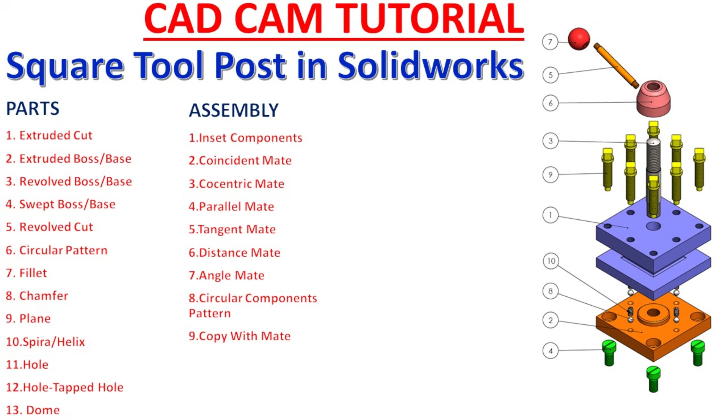Today we are going to take a simple exercise in SolidWorks, and here we are going to make a square tool post with the help of 2D drawings. We will make each and every part separately, assemble at the end, and also make a simple exploded view. You will learn all the basic features in this project.

I hope you like it. So let's start to make this project.

Let's make the first part of the square tool post, and that is the body. This is our main body, this is the top view. In section view, the first extrude is 30 millimeter, then the last extrude is 20 millimeter, and the middle one is 90 minus 50, which is 40 millimeter. The outer dimension is 150 by 150.

Then this middle one we are going to make, and that is 80 millimeter. 80 millimeter square we are going to extrude up to 40 millimeter. The last one is 20 millimeter, and that is the same dimension.

At center we will make one counter bore hole. You will see 27 millimeter, 60 millimeter for the counter bore hole, this length 10 millimeter. And there is a chamfer, 2 by 45 degree.

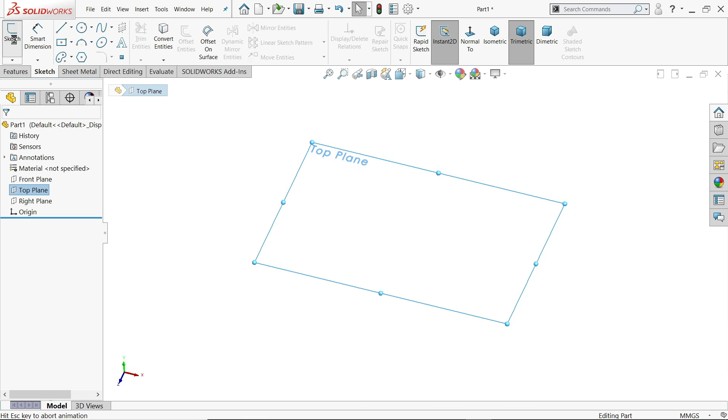So let's start with top plane sketch. Now activate center rectangle tool. Now 150, press tab key, 150, enter, escape key. Now see, this is perfect.

Now I'll extrude, and the end condition we will keep blind, and the first one is 30 millimeter. See, let it go downward so that all align one by one. Okay, that's it.

Back surface sketch. Again activate center rectangle, and this is 80 by 80. So press 80, tab key, 80, enter, escape key. Go to feature and activate extrude boss feature, 40 millimeter. See here, blind condition 40 millimeter.

Keep merge result so that we will get one body. If you unmerge, you will get two bodies, and that is we don't want.

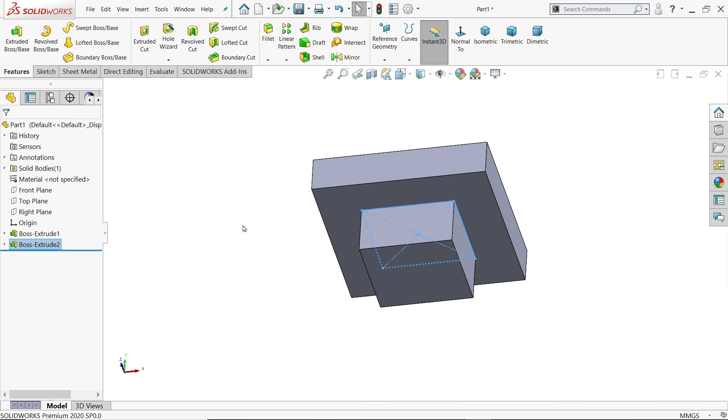Now I'll choose this face, sketch. Now here we already created sketch 1, so just click on sketch 1, convert entity. See, no need to draw again.

Activate extruded boss base feature, 20 millimeter. Isometric view, say yes. That's it.

Now counter bore hole we want to make from back side. Hole wizard. Now here choose legacy hole. In the type, choose counter bore. Now here the main diameter is 27, the center one.

27. Depth is defined by end condition, so we will keep up to next, or even you can choose through all. Let's say through all. So this is the depth.

Now the counter bore diameter is 60 millimeter, and the depth of counter bore is 10 millimeter. Okay, then there is no more to change anything.

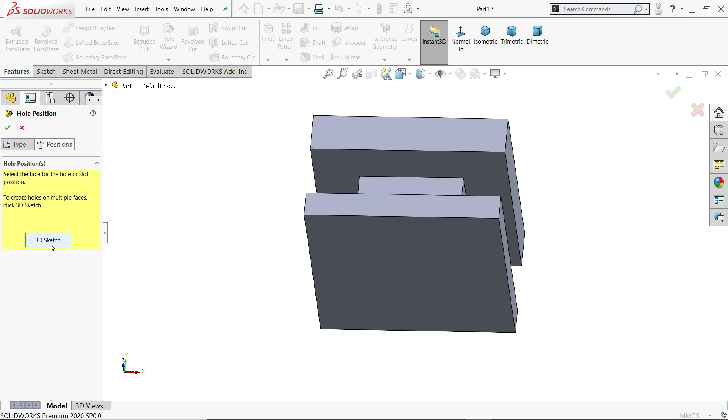Just go to position. Now it is asking you to choose which place you want to apply, so I'll select this face. Now see, you move your cursor to origin point, escape key to exit, and you will see the preview. I'll say yes, and look, the counter bore hole is created.

It is missing something here, so what we will do is edit feature. Now here we will do blind, and we'll edit this dimension, let's make it more than the length of this. Say okay, look, perfectly fine.

Now here we need to make these 8 holes, and you will see this hole dimension, 8 number of holes, M16. This is a threaded hole, so we will make these 8 holes.

Then there is 4 holes like this. See, 18 millimeter long, you will see 4 number of holes and depth 18 millimeter from point. So let's make this also.

So first hole wizard. Now I'll choose here straight tap, DIN standard tapped hole. Now that is M16. See, now end condition I'll keep up to next.

Okay, now here we don't want any countersink or anything. With thread callout also we don't need. Just simply choose cosmetic thread.

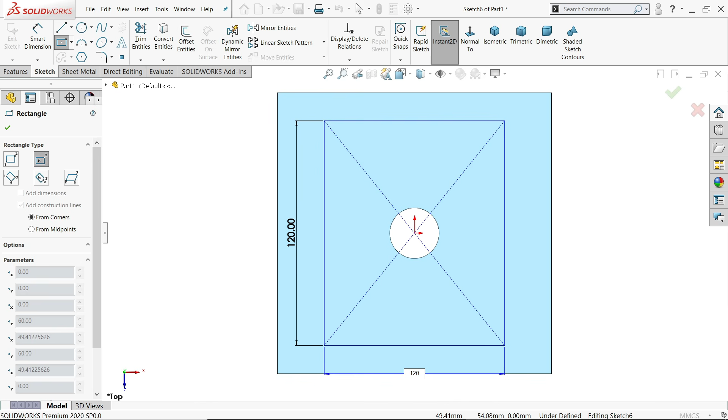Position, select this one. Just escape key to exit, activate center rectangle. Now 120, tap, 120, enter. Now here make sure you selected for construction purpose, say OK. Now by default here one selected.

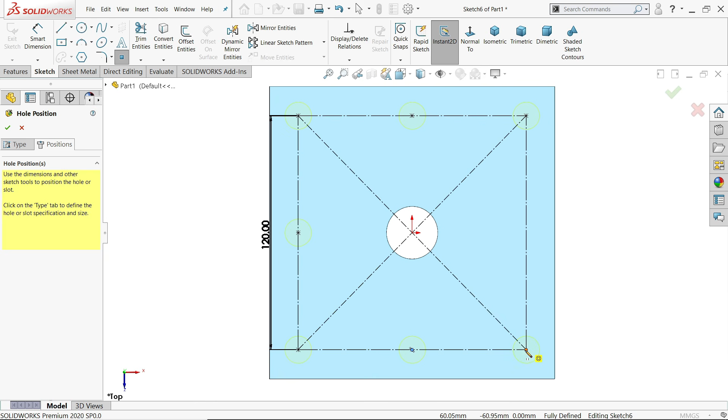Hold shift key and merge this point. Now activate the point here. Now place 1, 2. We need 8 numbers, so now escape key to out.

Now you will see the preview here, say OK. Now go to options, documents, properties, detailing, and just check shaded cosmetic thread, say yes, and you will see the threads.

Now let's select hole wizard. Here we want to make a hole, DIN standard drill size, and the hole is 10 millimeter, the simple, blind condition, and we will choose depth up to tip, 18 millimeter. Position, select this one, escape key to out.

Now let me activate center rectangle, draw a rectangle. Now define this 120, tap 120, enter. Okay.

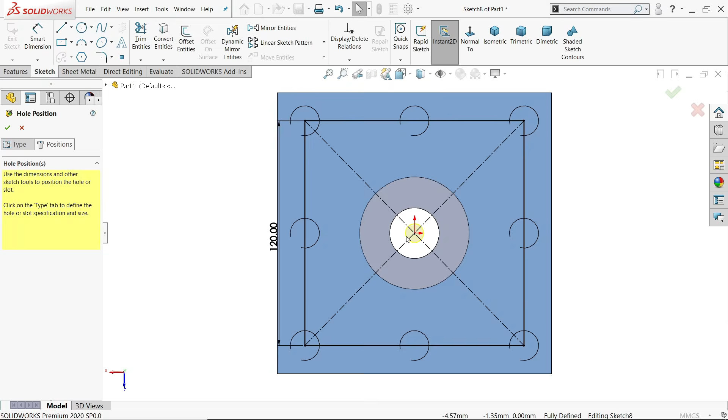Now this center hole we don't need, so again we have to delete. I don't know why this happens. Now let's merge.

Now click this point and activate the tool. Just place one here, one here, one here, and one here. Say OK.

We will apply some solid color to it.

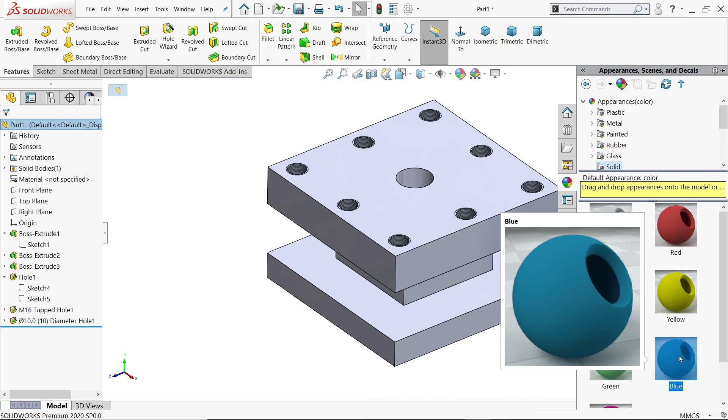Now activate fillet 3 millimeter, and I'll choose this corner. If you see some options here, it won't give proper options, so let's check one by one.

Say OK. Now let's save this one, create a new folder, square tool post, and this is the first part, so we will say body.

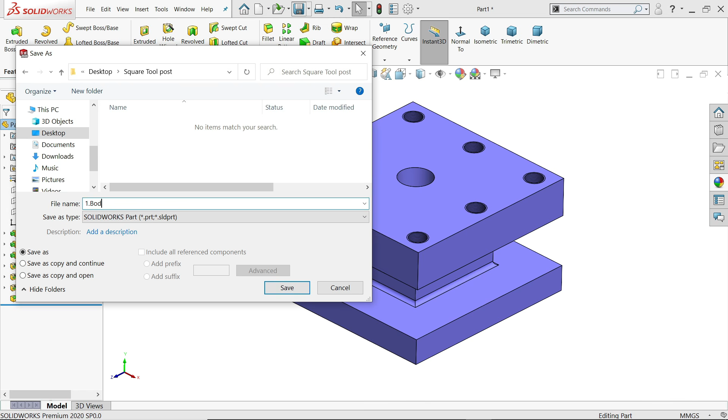Now just check the bottom side and say chamfer. Keep angle distance for the first one, 2 millimeter and 45 degree. Say yes. Save, let's move to next part.

Here the next part is base plate. So this is 150 by 150, thickness you will see from here 25. Then there is one circular body and this diameter 60, and this thickness from bottom is 34, so means it's 9 millimeter from this surface, and there is a 2 millimeter chamfer.

Then there is a counter bore hole, you will see 25 millimeter long, 28 outer diameter, 15 depth. Then 17 millimeter is the throughout hole diameter, so there are 4 numbers of things. So we will do this one, and at the center there is a thread M25 into 1.5 through DIN standard. Then there is one more cutout, like V cutout, 10 millimeter, 90 degree.

Top plane sketch. Now activate center rectangle, same 150 tab 150, enter, escape key to out. Now go to feature and activate extruded boss base feature, and this one 25 millimeter. Let's move upside, say OK.

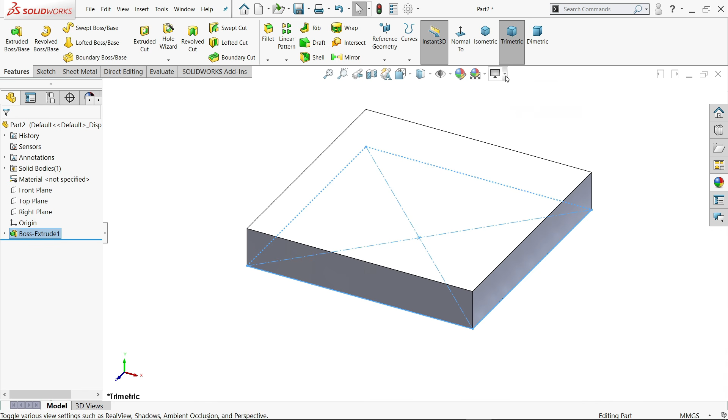Now select this face, sketch, now activate circle, and this diameter 60. Now activate extruded boss base feature. Now this width is 34 minus 25, it's 9 millimeter. Upside, say yes.

Now click on the edge and you will see the option chamfer or fillet. Chamfer, angle distance 2 millimeter, 45 degree. Say yes. Look, now there is a hole wizard at the center.

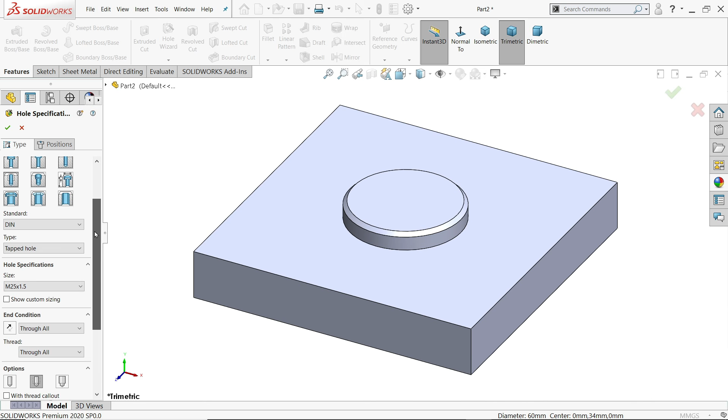I'll choose here straight tap, DIN standard, and tap to bottom hole, and that is 25 millimeter, 1.5 and 25, and end condition keep through all. We don't need any thread call out here, just simply choose cosmetic thread. That's it. Position, click this one and place at center.

Escape key to out. Just check the section view. Say yes. Go to option, documents property, and here you will find detailing. Click shaded cosmetic thread, say yes. Now we are going to see the threads.

This is the outer diameter, this is the inner diameter. Outer 25, inner it's maybe 23.5 something according to calculation. Now hole wizard.

Legacy hole, simple counter bore hole. Now the main diameter, this one is 17, and the blind - this one actually we want throughout, so let's check the condition through all.

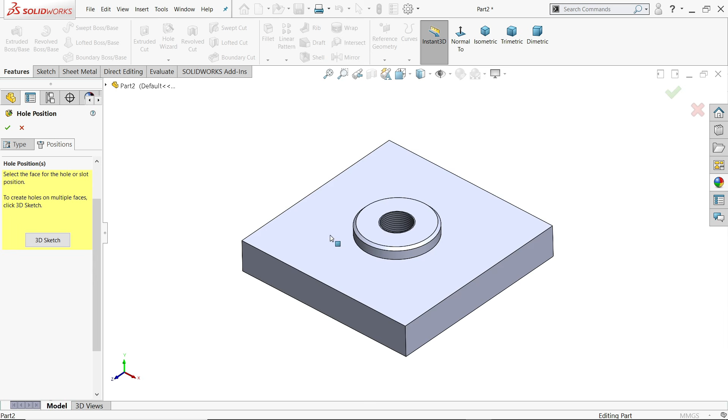Counter bore 28, depth 15, and then no more things we need. Position, select this position, just place somewhere here.

Now hold shift key, horizontal, these 2 points vertical, now these 2 points vertical. So this is a kind of relation going to be happened. Now this distance according to drawing is 116 millimeter, 116 millimeter.

Now I'll make a central, vertical and horizontal center line. Now let's define this. Hold shift key, select these two and center one, and you will get option make symmetric. The same we will apply for these two, symmetric. Now this is fully defined sketch.

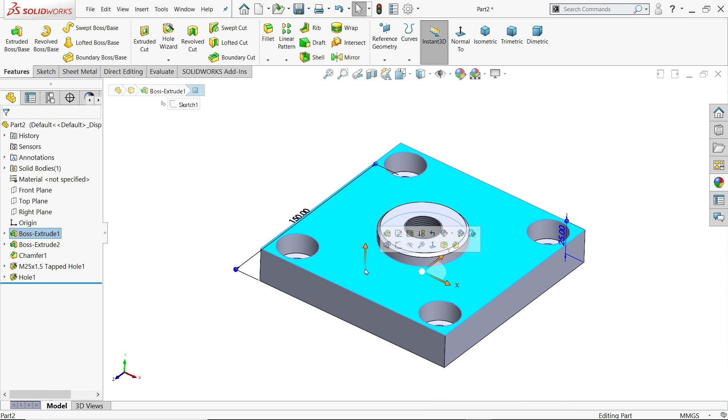If I am going to see section view, make sure it is going out, say yes. Look, now actually we want to create a front plane. We want to cut here actually. Okay, now let's make these two perpendicular to each other, as well as equal.

Dimension 10 millimeter. Now distance from center, it's 120 by 2, it's 60.

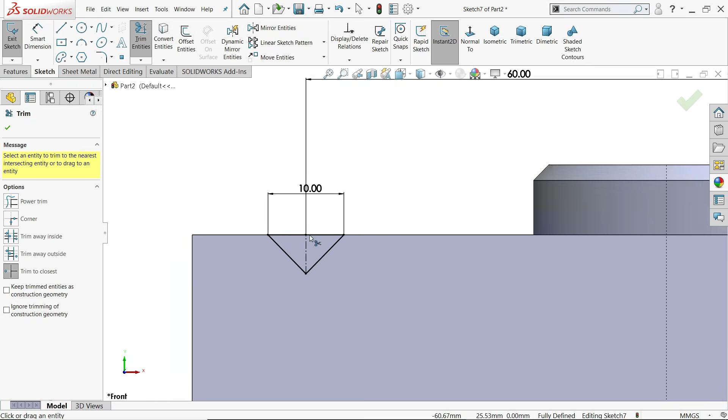Now go to trim entities and trim these two lines. Still we are missing angle 45 degree, and from here to here 5.

Choose revolve cut. Now see center line selected, this one 360 degree, say yes. Now look.

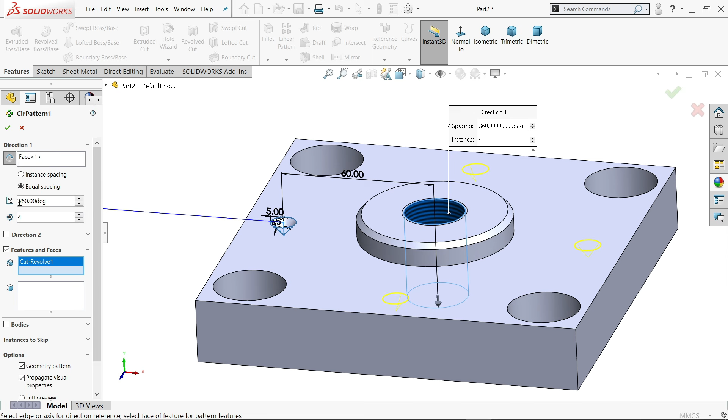Activate circular pattern. Now I'll choose any circular face. Now here the feature cut revolve is selected, equal spacing angle 360 and 4 number of instances we need, say yes.

Orange. This is part 2, base plate.

Now here the third part is stud, length 160. This 60 millimeter upper portion is threaded M25, bottom 30 millimeter is threaded M25. The middle one is 27 millimeter, and there is a dome shape 5 millimeter from here.

So let's make this one. Front plane is sketch. Let's activate line tool.

Make sure this one vertical. Let's define this.

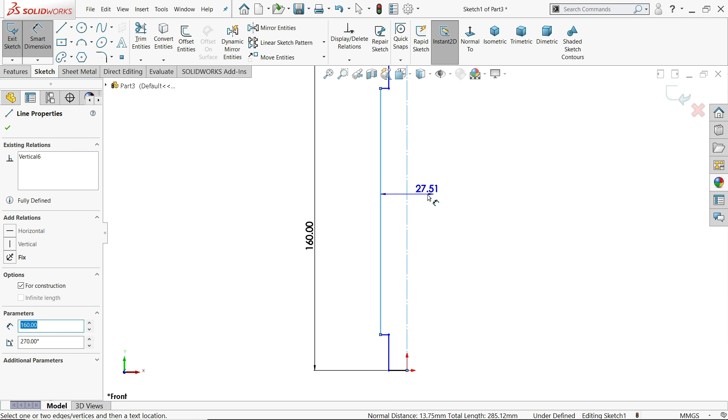160. Now make this one construction line so it's easy for us to define center distance or diameter 27.

Now this one 25. Now here also 25.

Now the length 10 - sorry, the upper length is 60. 30 millimeter is the bottom one.

Go to feature and activate revolve boss base feature. It is asking if you want to close geometry automatically, say yes.

The axis selected here, axis of revolution. Angle we keep 360, blind condition, say yes. Look.

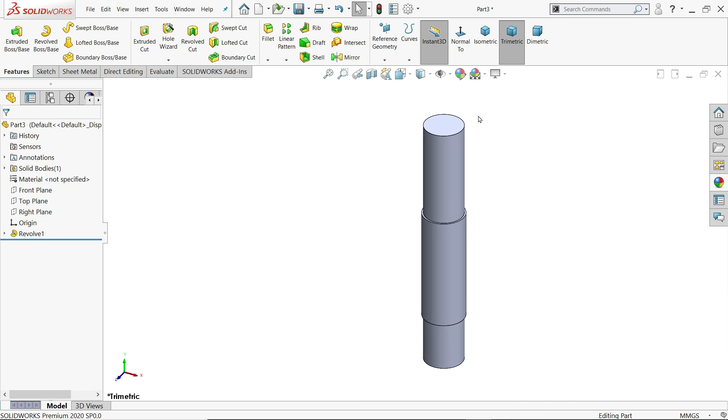Now let's add cosmetic thread here. Go to insert, annotations, cosmetic thread. Now I'll choose this edge.

DIN is standard machine thread we are going to make for this. Now here we need to make 25, so this is M25. Let's make up to next. Thread class we will keep 1. So this is the things going to happen. Say OK.

Let's apply to bottom. Insert, annotations, cosmetic thread. The edge is already selected here, standard DIN machine thread.

Now here the size of our thread is M25. Up to next - next means up to here, this step. Say yes.

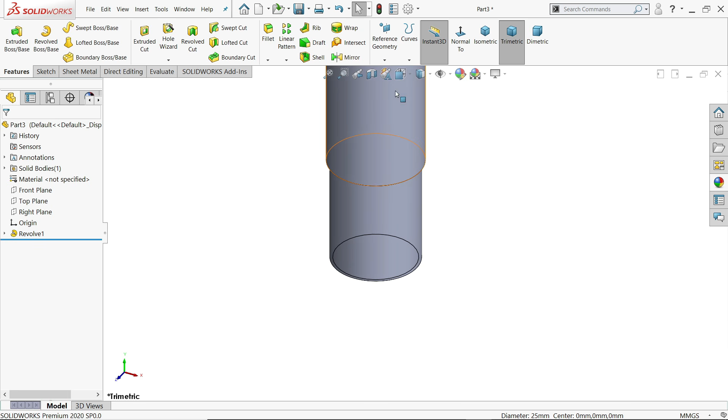Options, documents property, detailing, cosmetic thread. Now look, it seems very clear.

Now go to insert features, insert feature, and here you will find option dome. Now I'll select this face. Now here I'll choose depth 5 millimeter. See.

Now this one we will apply a material like metal - brushed steel. Say yes. This is part 3, stud.

Here the fourth part is knob. See the knob with thread.

So first make this round knob R20. Then we will cut from this end to this end is 38. Then 10 millimeter depth thread here.

This thread dimensions you will see here, 10 millimeter deep, M10 into 1 millimeter. So let's do this.

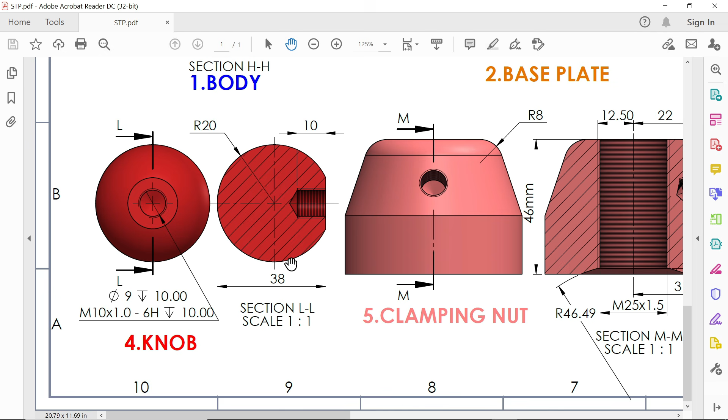Front plane sketch. Now I'll choose here circle. Now diameter 20 means 40 radius - sorry, radius 20 means diameter 40.

I'll choose line. Now trim entity, and I'll trim any one, like let's say this one.

Activate revolve boss base feature and choose this line. Axis of revolution, angle 360 degree. Say yes. The whole circle is created.

Now front plane. Now we want to trim. Let's say connect one line from one end to this end. Make sure this okay. Activate smart dimension.

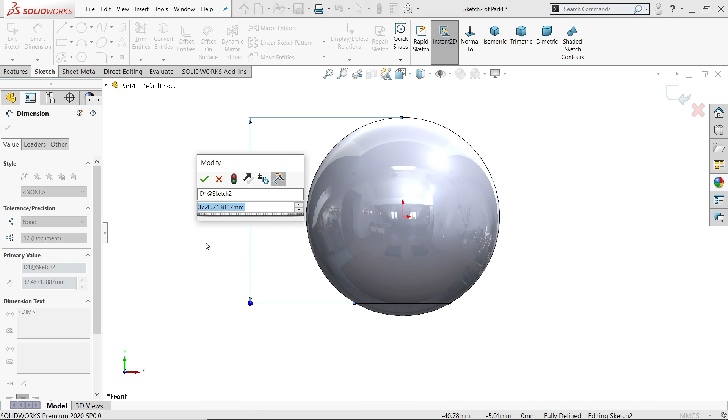Select this one, hold shift key and select the outer edge, and you will see we can put the dimension from outer side, but you have to hold shift key. This is 38 millimeters. Say yes.

Now line is enough. Activate extruded cut. Keep end condition through all, both.

You will see it's going to cut, but you will see the arrow is upward. Make flip side to cut, downward. Say look, the things are cut.

Hole wizard, straight tap, DIN standard, tapped hole, and here is the thing is 10 millimeter.

Now depth we need to keep blind 10 millimeter. Now here the depth is like depth up to shoulder, not through all.

Then thread also keep 10 only. We don't need any collar or any countersink, so unchecked. Make sure cosmetic thread is selected.

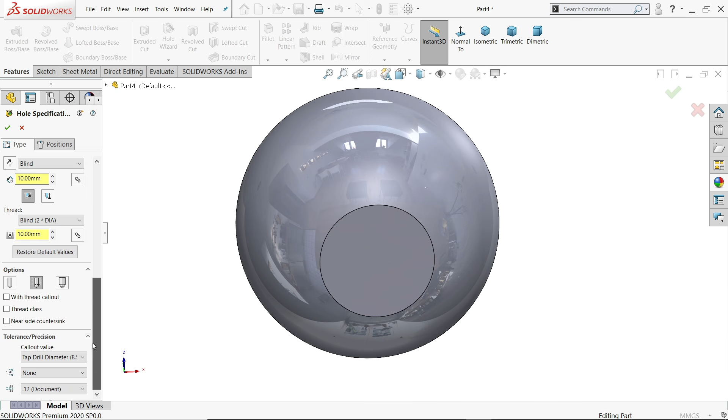Check position, select this face and place at center. Escape key to go out and see the preview.

Say yes, and let me activate option documents property detailing. Shaded cosmetic thread. Say yes.

Now I'll apply some solid rod metal - sorry, the color. Section view, see.

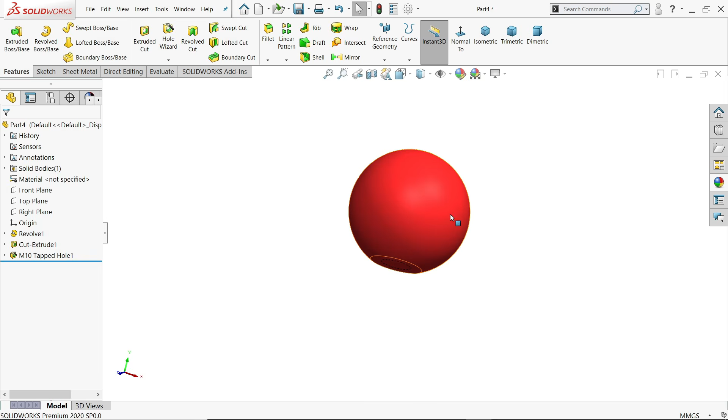Now let's save. This is part number 4.

Okay, now here the next part is clamping nut. So let's make this half portion 22 from top, 31 from bottom, vertical length 20.

Then make this one, and the corner is R8. We will make this letter. Then there is a hole, threaded hole, and that is 25 into 1.5 millimeter.

That's it. Then at bottom you will see there is a kind of chamfer, radius 46.49, and this top distance 12.5 from center and 2 millimeter thick, you will see here.

Then you will see the important thing here, hole with thread, the same hole what we did, M10 into 1, 10 millimeter, but we have to do one thing.

Center distance from this edge is 10, so we have to clear, make a sketch geometry, then plane, then we will spot the position. Even though directly we can do it, but let's see.

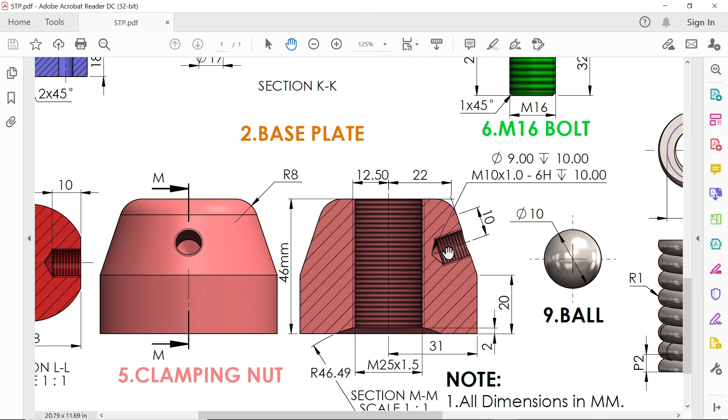Front plane, sketch. Now activate line tool.

Activate smart dimension. This is 46 millimeter. The bottom one 31 millimeter, 20 millimeter, and this one 22 millimeter.

You will see. Now I'll activate the Revolve Boss Base tool, and I'll choose the center line. Angle 360, end condition blind. Say yes.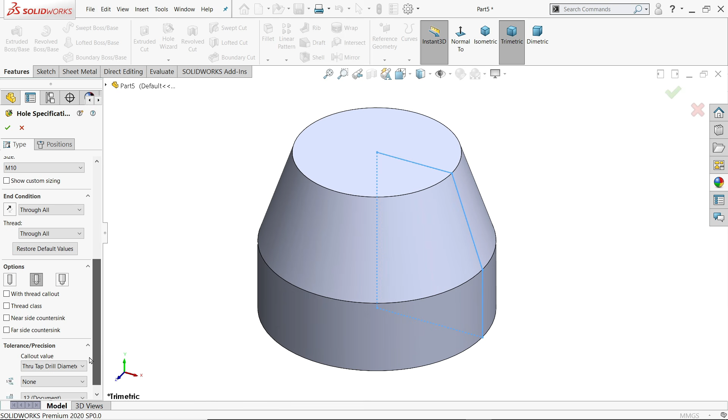Let me uncheck Hole Wizard. Now here we need to make a hole. Straight tap, DIN tapped hole, M10, the same thing, and here only choose through all. We don't need any color or anything.

Position, I'll choose this one, and I'll place it at center. Go type. Okay.

This one, M25, and 25 into 1.5. Now this seems better. Say yes.

Actually I have to do this one permanently, so that we don't need to do shaded cosmetic thread.

Even though I'll put fillet 8 millimeter, and here you will see custom fillet, clear, eight millimeters. Say yes.

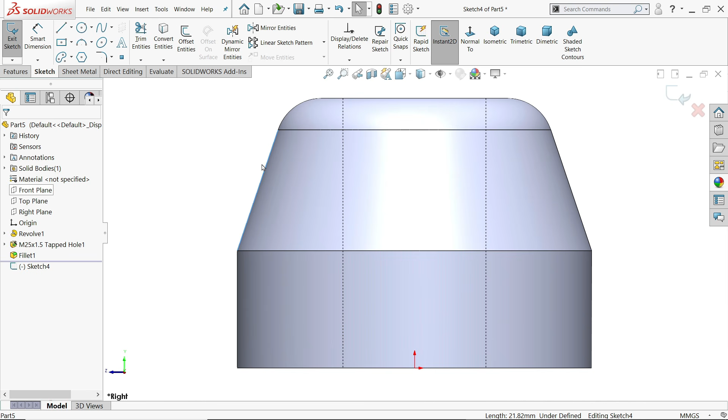Now let's say right plane, sketch. Now I'll select this outer edge, convert entity, and click this one and make construction line, sketch, because it helps us to locate our hole.

Now we will create one plane also there. So I'll choose plane, this one. Now here reference geometry, we will keep face. This face is tangent to this one and perpendicular to this. This is the perfect position.

Say yes. Hole Wizard, and let's choose the straight tap, DIN tapped hole, and this is M10 into 1, and depth it's 10 millimeter. Thread also not more than that.

Position, put somewhere here, escape key to get out, dimension. Now I'll activate dimension from here to here. That's the position we need.

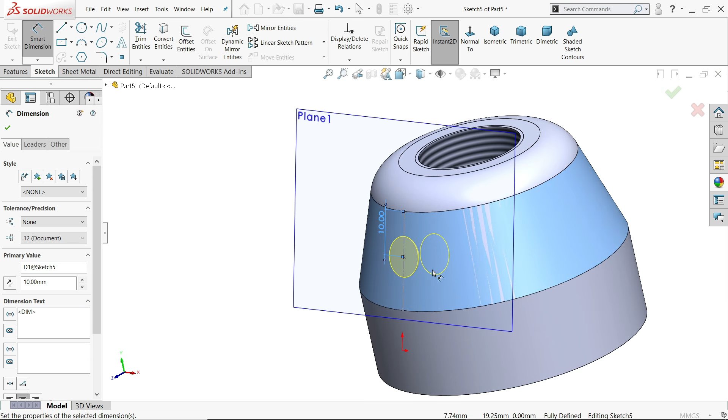Say OK. Let me hide the plane. Now hide the sketch also. If I am going to see section view, right plane.

Now look, this is how the threads are created. Let's make it a little light, say okay.

Now this is part number 5. This is the clamping nut.

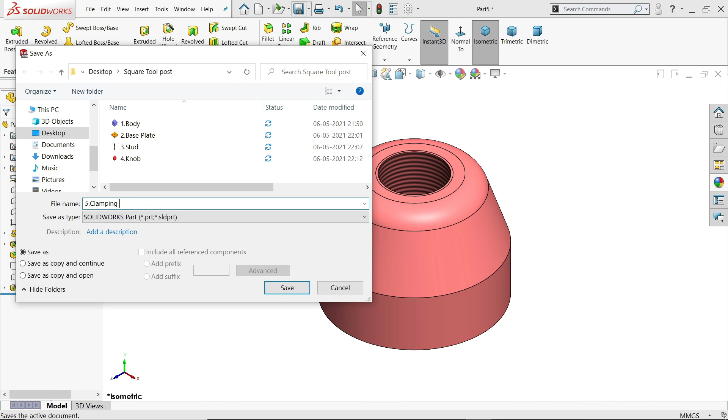And the bottom one, again we need to do right plane sketch. Now here I'll say line, start from somewhere from here, go back to the point and see it's converted.

Now define some dimensions, like this one is 12.5, 2 millimeter, radius that is 46.49.

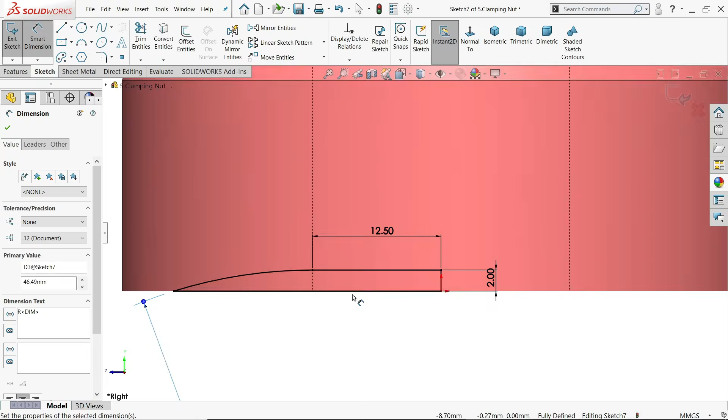Hold this point. Okay, one important thing, don't make this line tangent to this. Delete this tangent. Origin point and hold shift key on this point, vertical.

See. Now activate Revolved Cut and choose this line as the axis of revolution. Say okay.

Here the next part is M16 bolt. Outer diameter 25, the bottom one M16 means we will make diameter also 16, length 32 and this is 12, and there is one slot only 2 millimeter and depth 4 millimeter, and there is a thread, machine thread, and that is M16 but 25 millimeter long only, chamfer 1 millimeter.

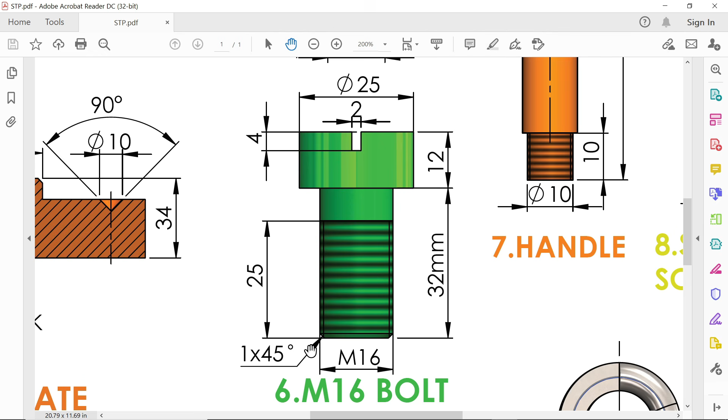So okay, let's start with top plane sketch, circle, the outer one 25, inner one 16.

Extrude, select contour and choose the outer one and make it go upside 12, end condition blind 12 millimeter.

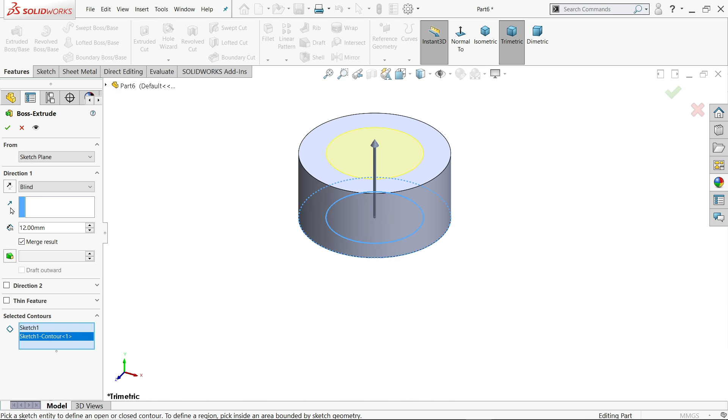Okay, now again activate the same, click on the sketch, activate Extruded Boss Base because it already took the selected contour, and this time I'll choose inside line or circle. Reverse, see it's moving downward. 32 millimeter, say yes.

Chamfer 1 millimeter, 45 degree angle distance, I'll choose this end, say yes, and let's activate insert, annotations, cosmetic thread.

Now here we need to add machine thread, DIN, machine thread, and this diameter is M16. I'll keep M16, I'll choose this edge, and blind end condition 25. See, this is minimum diameter or minor diameter, say okay.

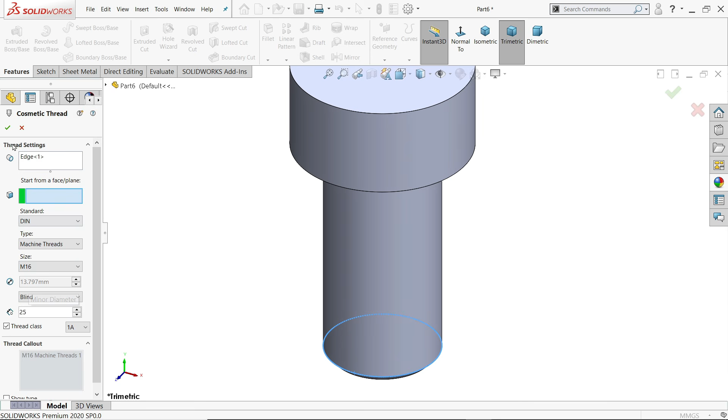If I am going to check options, documents, property, detailing, and we will see the thread, top plane.

Activate center rectangle. Now 2 millimeter and select this circle, hold shift key and this line, make relation tangent or constraint tangent.

Activate Extruded Cut tool and depth is 4 millimeter. So in end condition blind and depth make 4 millimeter, say yes. Look.

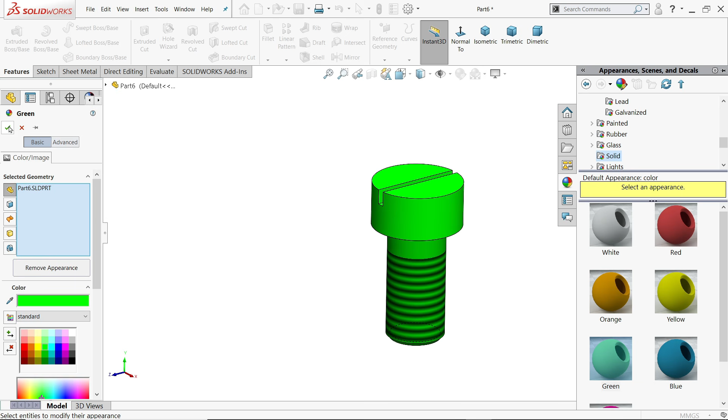Even though let's say this is part number 6, M16 bolt.

Here the next part is handle. This overall length 115, the center diameter 12, and outer side there is a thread 10 millimeter M. This diameter 10 millimeter thread, 10 M10 also there.

So let's try. Let's write top plane, and let me start with line.

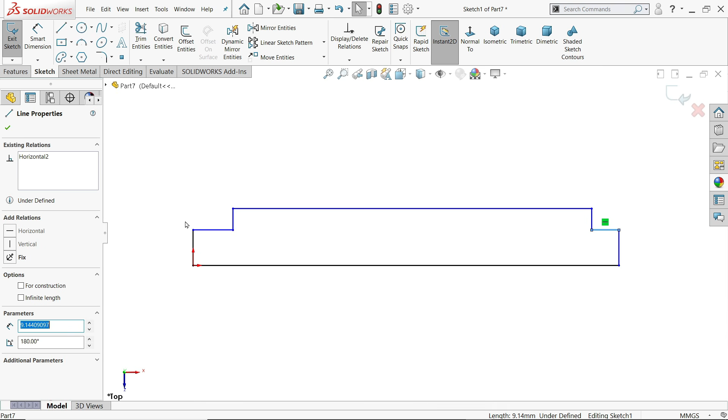Hold shift key and select these two lines, collinear plus equal. Now first length is 115, then 10. Now hold, make this line construction geometry, smart dimension. If I choose this one, there are two options. If you keep outer, you get diameter, inside radius. So let's say diameter 12, and this one 10.

Feature and activate revolve boss base. It is asking if it will close automatically. Say yes. Look.

Insert annotations, cosmetic thread. I'll choose this edge, and this is going to be M10, M10 into 1. Next, no need to define any length here. Machine thread DIN standard, say yes.

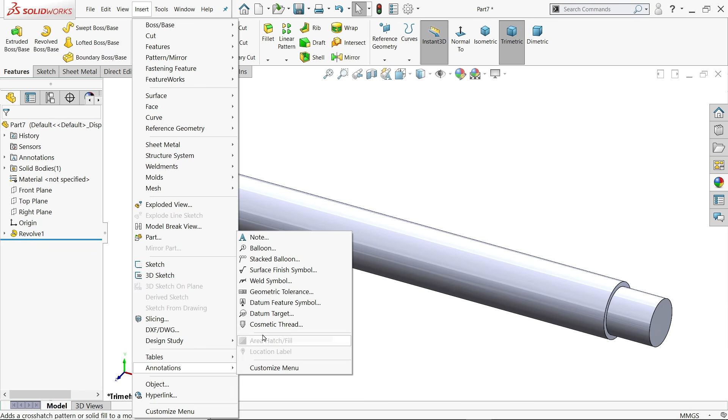Again insert annotations, cosmetic thread, and I'll choose this edge. M10 up to next, machine thread DIN standard, say yes. Detailing. Now let's define some solid color for these parts since they're small, so it's easier to see.

Part number 7, handle.

Now the next is set screw. This is a threaded screw and the top is square. You will see this is tangent to the outer one. So the bottom one is 10 diameter, then 16 millimeter is the outer diameter of thread M16, then 56 length, 5 millimeter there is a slot, and this diameter 22. Then there is a rectangle 14 millimeter upside, but this is tangent to this, and corner radius R2. We will see it later.

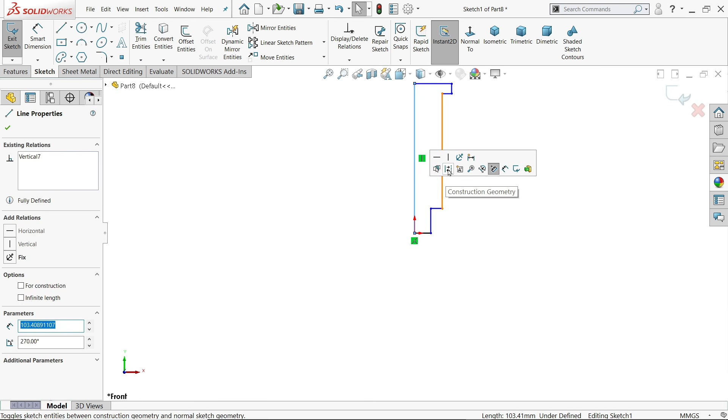So let's do this. We will choose front plane, sketch, line, connect. Make sure this is construction which helps us create dimension. Now let's make 5 millimeter, 56 millimeter, 10 millimeter.

Now let's define the distance between these two. If you keep cursor out, you will get diameter 10. For this one 16, and for this one 22.

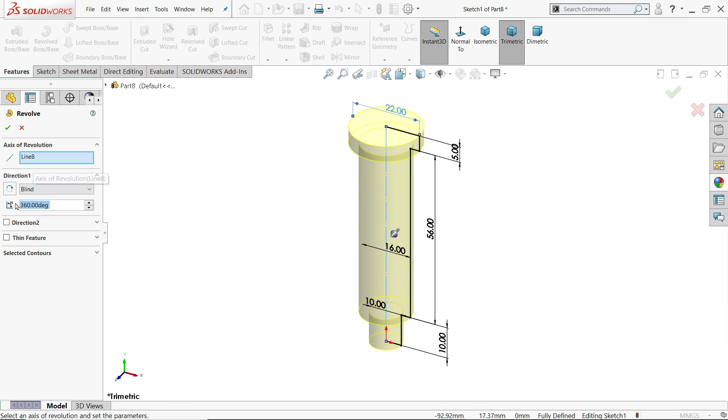Activate revolve boss base feature, say yes, and see axis selected here, axis of revolution, 360 degree blind condition or end condition. I'll select top face, sketch, activate center rectangle, and just keep like this.

Make one relation, hold shift key and select these two lines, equal relation. This is an important relation.

Now sketch fillet 2 millimeter radius and I'll select the whole rectangle. Say yes, yes, yes, okay.

Now I'm going to create a relation. I'll choose, okay, cancel this one. This outer circle, hold shift key and this radius, tangent relation. See, the drawing is fully defined. No need to define anything more.

Activate extruded boss base feature, end condition blind, and length or say depth 14 millimeter. That's it.

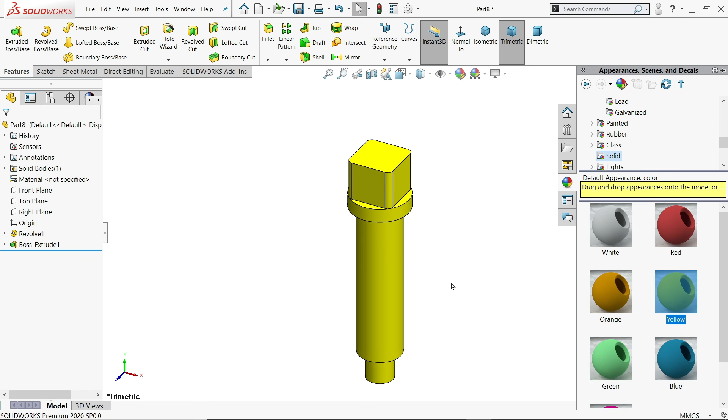Insert annotations, cosmetic thread. I'll choose this edge, DIN standard machine thread and M6, M16, and the depth is up to next. Say OK.

Options, documents, property, detailing, cosmetic thread. Look, this is part number 8, set screw.

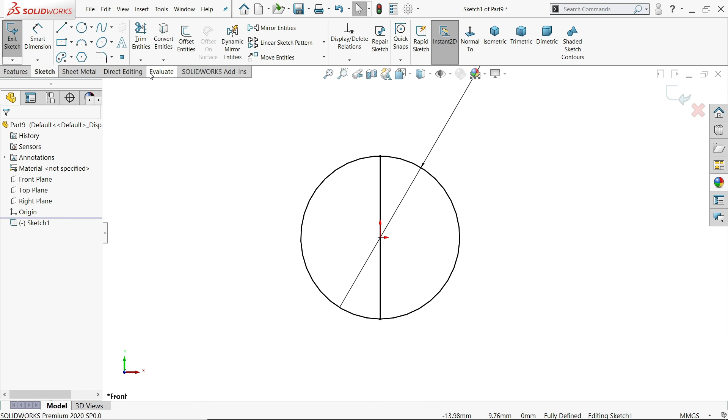I'll show you. Let's make the ball first because the 9th part is ball. Front plane sketch, 10 diameter. Activate line and draw one mid line, connect from this end to this end, and any extra line we have to trim. Trim entities, click power trim and just drag and trim.

Activate revolve boss base tool. I'll choose the center line, say yes. Now let's add some material like brushed steel.

Save. This is part number 9, ball. It is going to fix inside. The last one is spring.

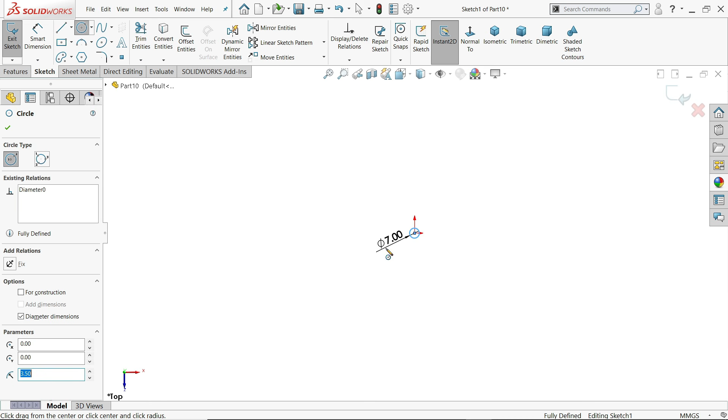So I'll start top plane sketch and we will draw a circle with 7 diameter. Escape key to get out. Features, drop down the curve menu, and you will find helix and spiral.

Now here I'll choose height and pitch because we have these dimensions. Constant pitch, height 15. Okay. Now pitch is 2 millimeter. Start angle 0.

Clockwise. Say OK. Now here we have an option called sweep boss base. I am going to choose this one and I'll choose here circular profile.

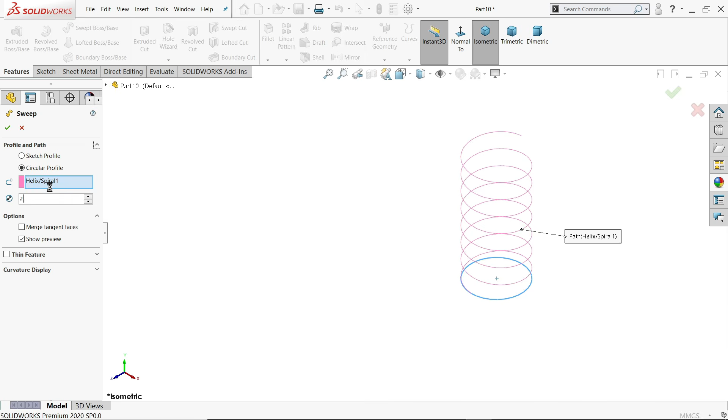Diameter I'll keep 2, now let's see how it looks - a compressed spring. This is the compressed spring, say yes.

Now let's hide this. Now I'll apply a brushed finish, or let's say satin finish stainless steel.

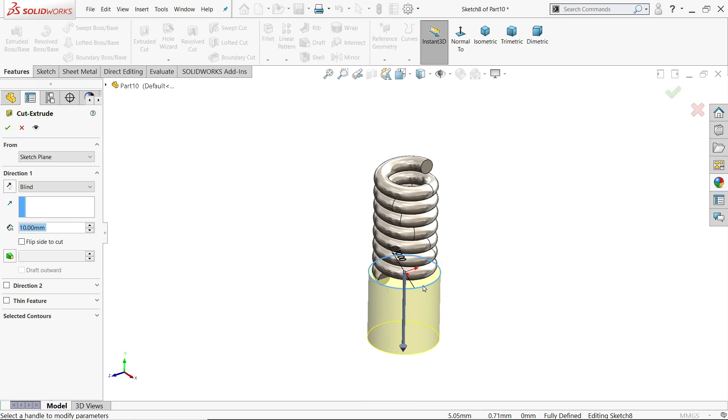Top plane, sketch circle. We want to cut, so draw one bigger circle, 10. Feature, select extruded cut. We want to cut this bottom face. Blind condition, 10, let's say. Click OK.

Now let's make a plane, choose this face, 15 millimeter on one side, flip side to offset, say OK. Now sketch - the previous sketch is already created, so select sketch, convert entity, no need to draw, simply activate the extruded cut tool, 10 millimeter end condition - no need, you can even say through all, that is also enough.

Let's hide the plane. Now this is part number 10, the compressed spring.

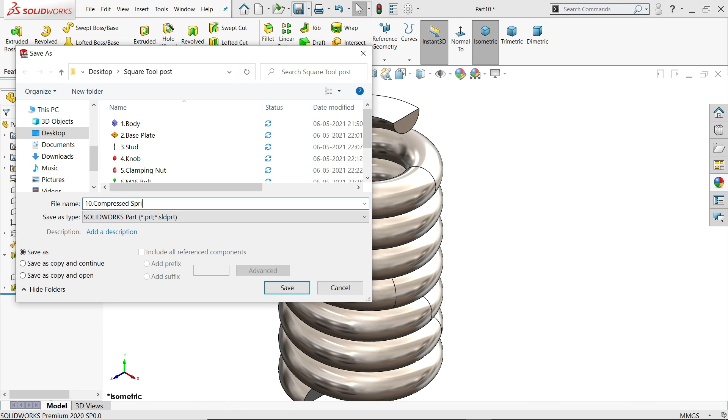Now let's make the assembly of the square tool post. You will see here on the bottom side these bolts fixed here, then there is a spring ball - even if you see a close view, the ball is fixed here and there is a spring inside. Then coming up the main body, there is a stud and 4 bolts here, then these are the upper accessories. So let's make the assembly.

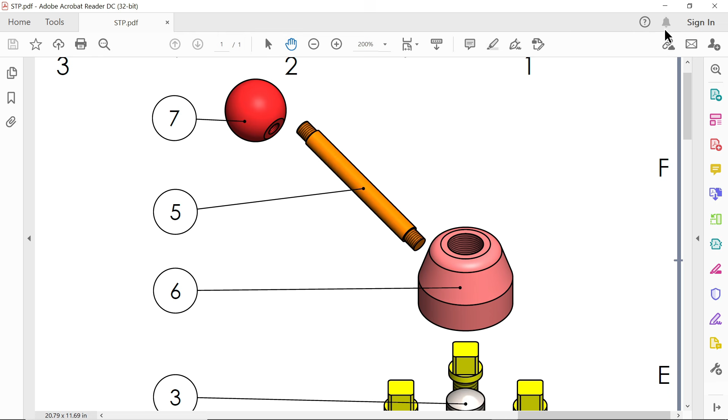File, new, and I'll choose assembly, say yes. Now if we open here, just check this one and click large icon, so it's easy to identify. The first part I'll choose is the body, open.

By default the body is always fixed, so we have to fix it at center or origin point. So how will you do it - I'll choose visibility off and check origin point off, and go to the origin point and see it's fixed, select OK.

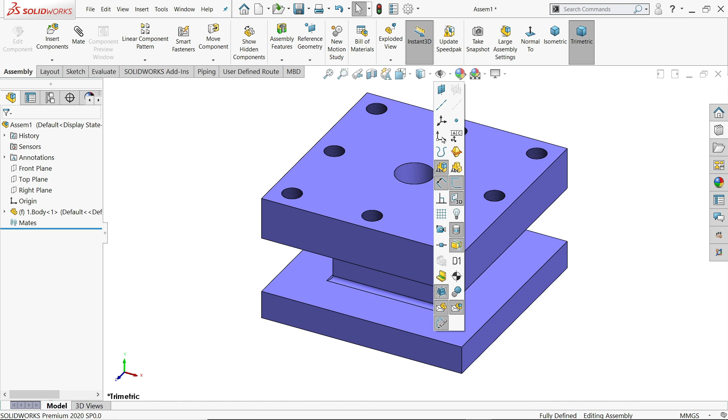Plain white. Now let me hide all this. Now let me hide the origin point, because our main part is already fixed at the origin.

Insert component, the second one, hold shift key, the third one, open. I'll fix it somewhere here, somewhere here.

Now activate the mate tool. I'll select the center one, this center one. Concentric relation, say yes. Now it's moving like this.

Select both side walls. Coincident relation created here, you will see here also, say yes. Now let's keep it as it is, we will fix this one later.

Select the outer face of the stud and this hole. Concentric relation, okay, because this diameter and this diameter are the same. Okay, let's keep it as it is.

Insert component, and let's say the bottom one, M16, this is important. Now first I'll fix this one - mate. I'll select this hole, this one, and this hole. Concentric relation, say yes. Just take it upside.

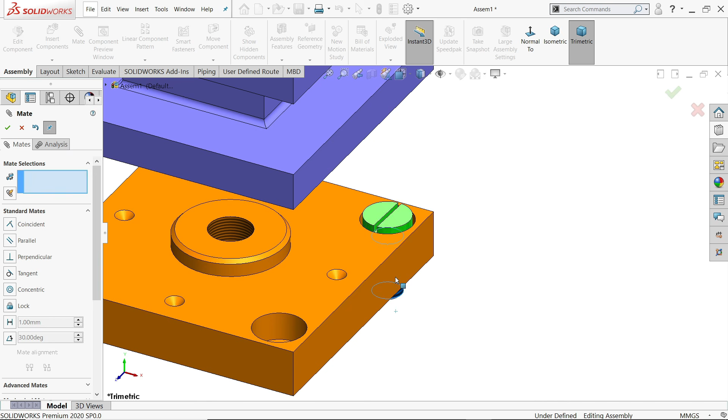Now I'll select this inside wall and this side wall, parallel, say OK. One more relation, just take it upside.

Select the back side, you will see here, and select this inside seat. It's going to fix here, say coincident relation, say yes.

Now we don't want to fix one by one all, simply there is one tool called copy with mates. Select components, I'll choose this component, select next. Now the 3 relations we created, we have to create them with all.

So the first one is concentric, I'll select this hole. The second one is parallel, so you will see the wall, select this wall. And the third one you have to select inside - where is this? Inside you have to find and choose inside.

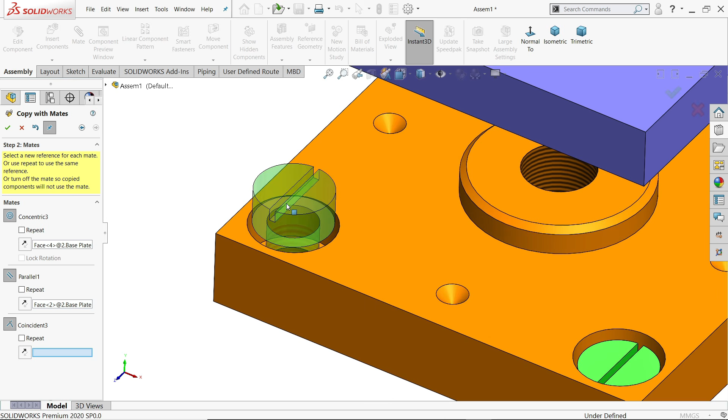Now say yes. Now the third one, I'll select this wall - the parallel, this wall - and the third one, this wall. See, it's fixed. Say yes.

Now repeat the same thing. This one, the wall is this wall, and this one. Say yes, cancel.

Okay, we made some mistakes here because we chose the wrong wall. Now here, just open it - this one we did wrong. Actually it should be from here. So edit - and which wall is this? This one and this one.

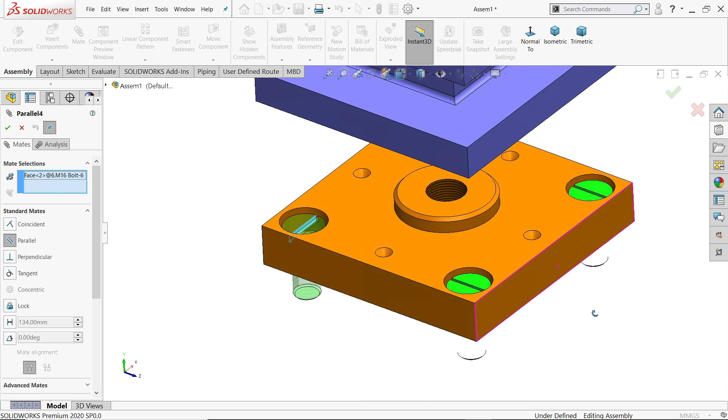So delete. Now this wall is selected, the next wall is this one. Parallel, say yes. Now see, it looks similar to all. Say yes.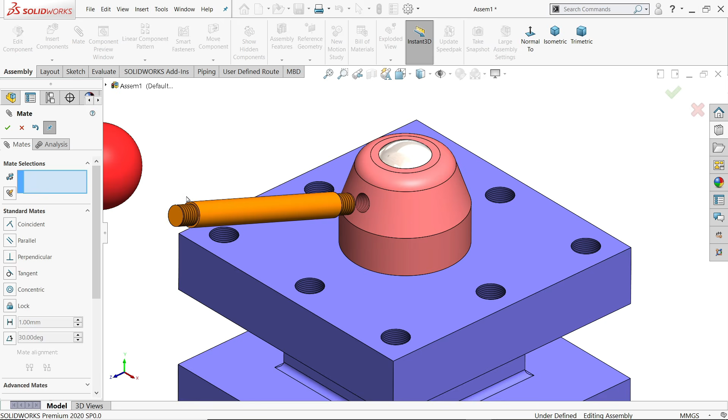Select this wall and the backside wall, and you will get a tangent relation. Say yes.

I'll choose this one, now let's find the hole - here, hole. Concentric relation, okay. Now here also the same relation - select this back wall and knob wall. Now it is fixed here. Okay.

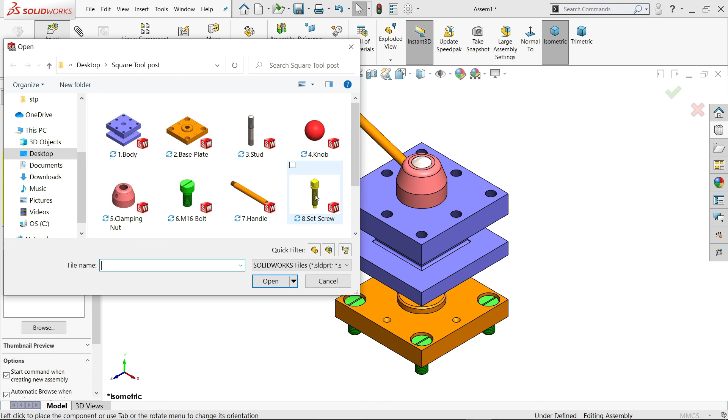Now even though you can make it free rotate or something, whatever you like to keep, but there is a relation thread, so we will see, we can create. Insert component, set screw. Now say open.

Now here we created one part. Now let's choose mate. I'll choose this one and this body. It's concentric relation, say yes. Now we want to fix this one, so we will make an angle. Select these two faces, make the angle 45 degree. Enter. Okay, now look, this is 45 degree to this.

I'll choose this face and this face. Here, one option called distance. 10 millimeter. Enter. Let's check. Okay, that is perfect, 10 millimeter.

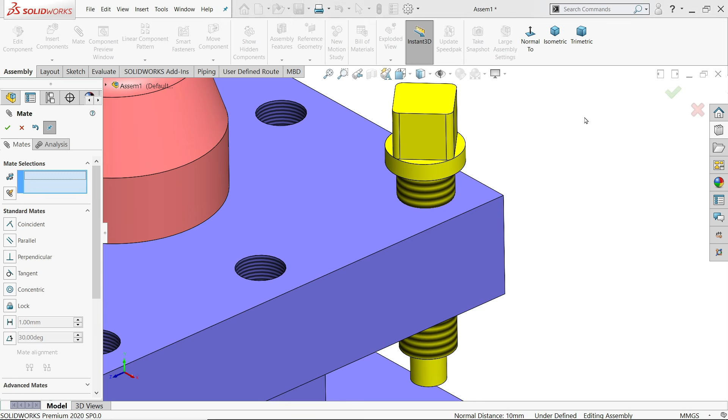Okay, let's try for this wall, fixed. Okay, this third one, this wall, fixed. Yes, this one, this wall, fixed. Say yes, don't forget to say yes.

Now select this hole, this wall and this wall. Say yes. This hole, this wall, this wall. See, one by one it is automatically going to take, just you have to select. Say yes. This one, this wall and this wall. See, all are going to create, say yes, cancel.

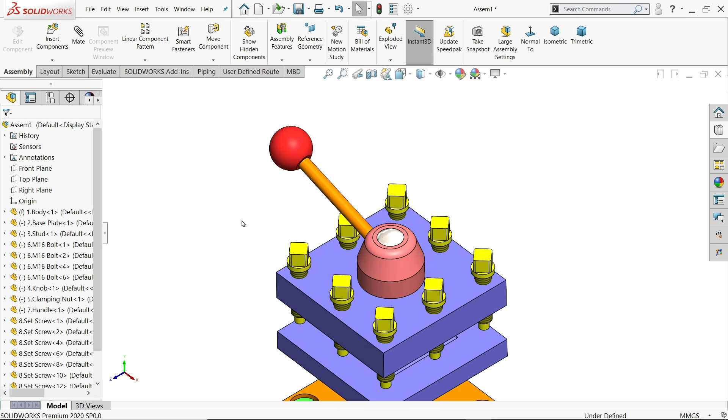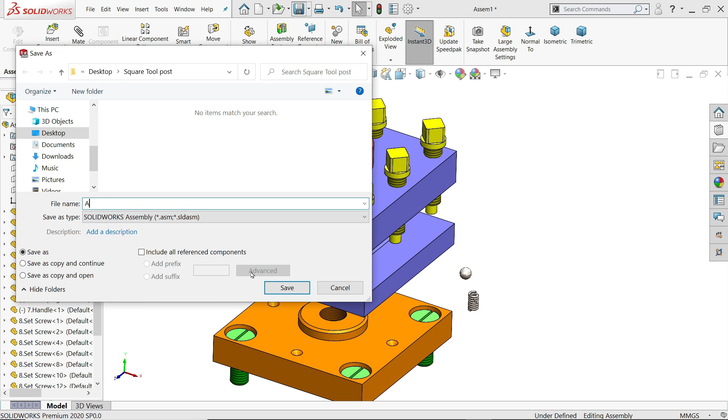Now let's select these two, ball and spring, open. Let me save it, otherwise if any corruption happens, then it's difficult. Assembly.

Now select this spring, we want to show some. Just click sketch visible, this is important, we need.

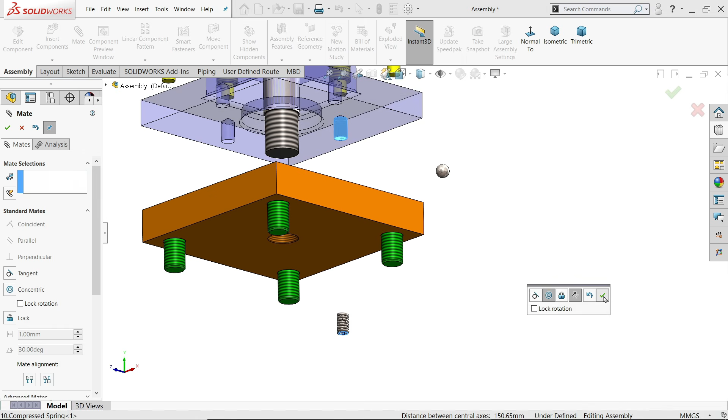Insert mate. Now let me choose this hole and this one. Concentric relation, say okay. Let's move and we will see. See, it's going inside. Now, let's take this one out. I'll choose this inside edge. Or select this face. You will see it's going to fix here, tangent, say yes.

Now let's drag this one near here so that it's easy to understand. Now the face selected, I'll choose this one, coincide. That's it, this is the position we like because we want to keep this ball outside. Say okay. Cancel.

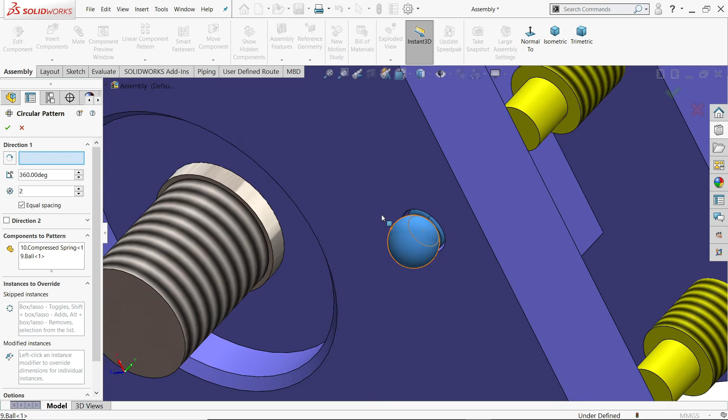Now select circular pattern, here select component. So I'll choose the spring and ball and any circular face, let's say this one. Number of instances or component, 4. Equal spacing, 360 degree. Say yes.

Now let me hide this one. Oh, that's it.

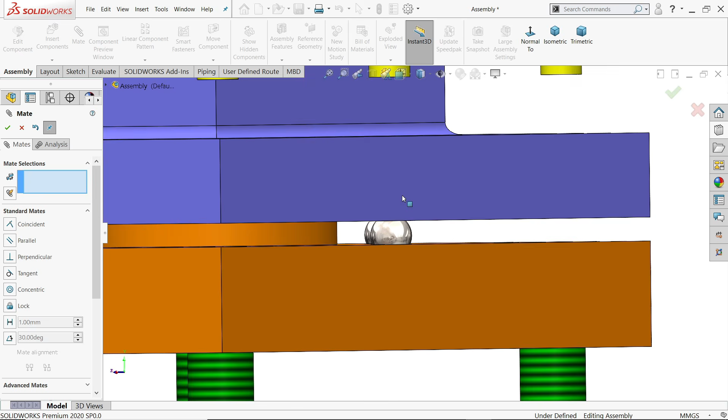Now let's go to fix the last option, mate. I'll select the ball, any one ball, and I'll choose this face. You will see tangent. Look how the ball is fixed inside this.

Let me save this one. Now let's make exploded view.

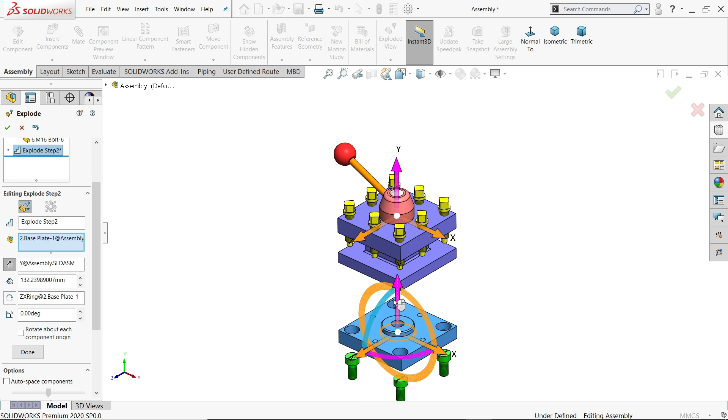Now first let's take it out, these 4 nuts or bolts. Click this arrow downward side. Now here say done. Now select this one, downward side. Let's hide 1 bolt, it's enough. Done. Now I'll select these 4 balls.

Let's say downward side. Done. Now what else, all springs. Take downward and you will see those springs easily visible. Done.

Now I'll choose these three together. And let's take upside. Done, this one.

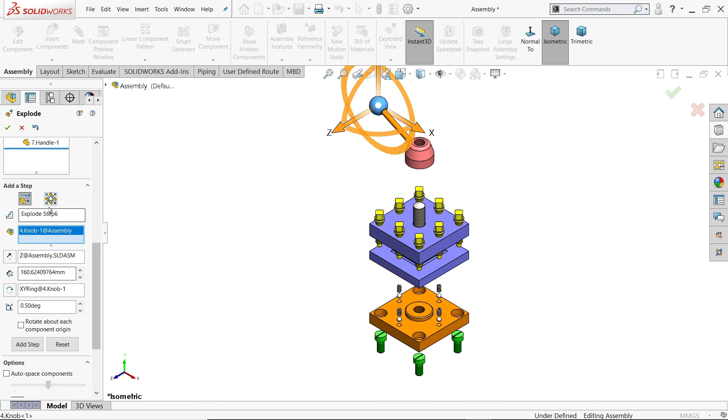Let's take this one out. Done, this one also let's take out. Done, and this one is on position. This one let's say here.

Done. Now let me choose all of this. 1, 2, 3, 4, 5, 6, 7, 8. Now let's take out. Okay.

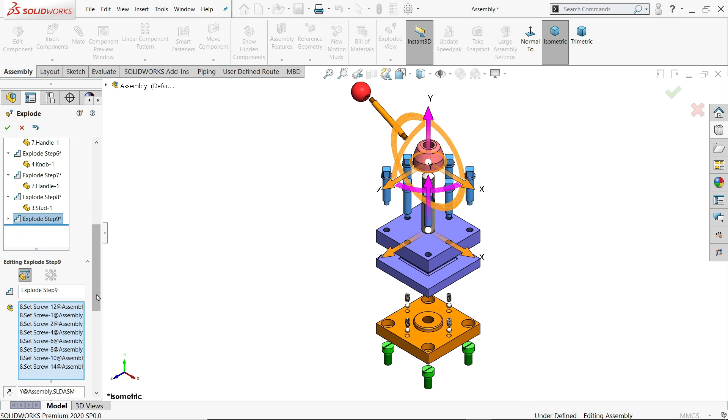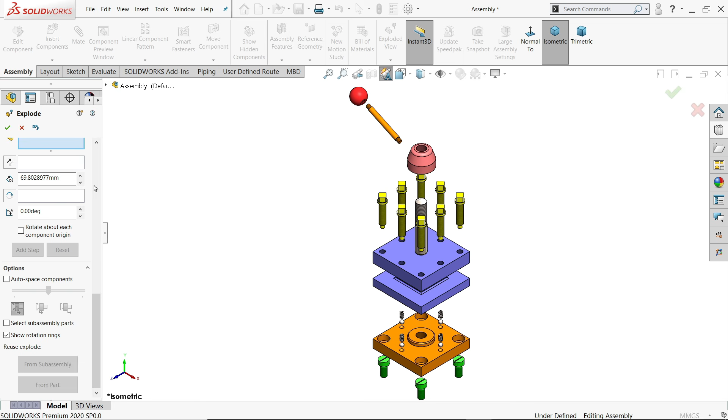So say OK. Now right click, collapse, right click, animate, explode, animate, collapse.

So this is the simple tutorial, and this is a good example for the beginners, those who want to make a project in SolidWorks. I hope you like it.